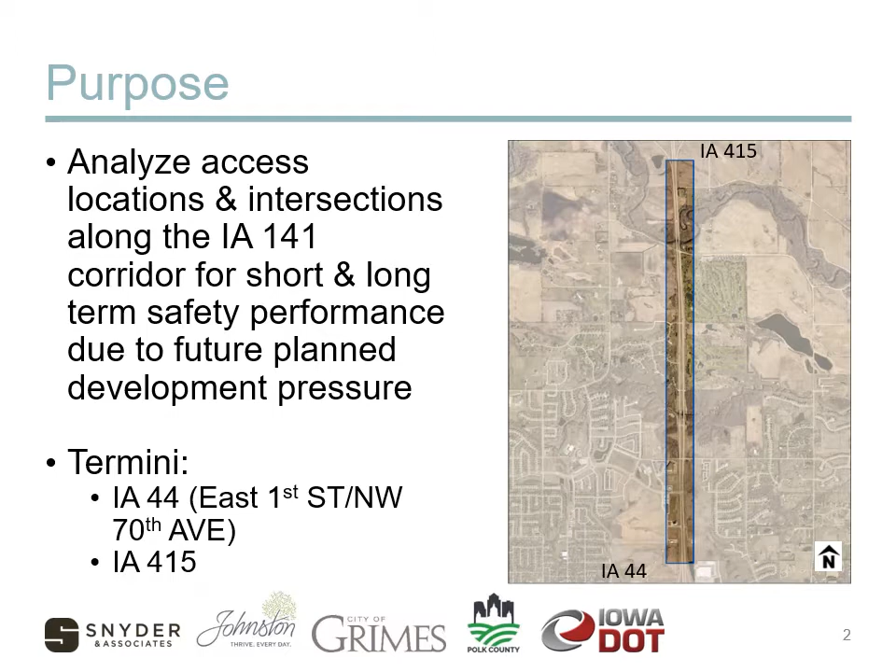To review background information on the conditions within the study corridor, previous planning studies, and local transportation planning that will support the long-term land use along the Iowa 141 corridor, please visit the City of Johnston project page located on the city website. You can also view the video recording of the first public information meeting on May 13, 2021, where the project team presented a summary of the background conditions and potential improvement options to corridor access that were considered while developing draft recommendations for the corridor.

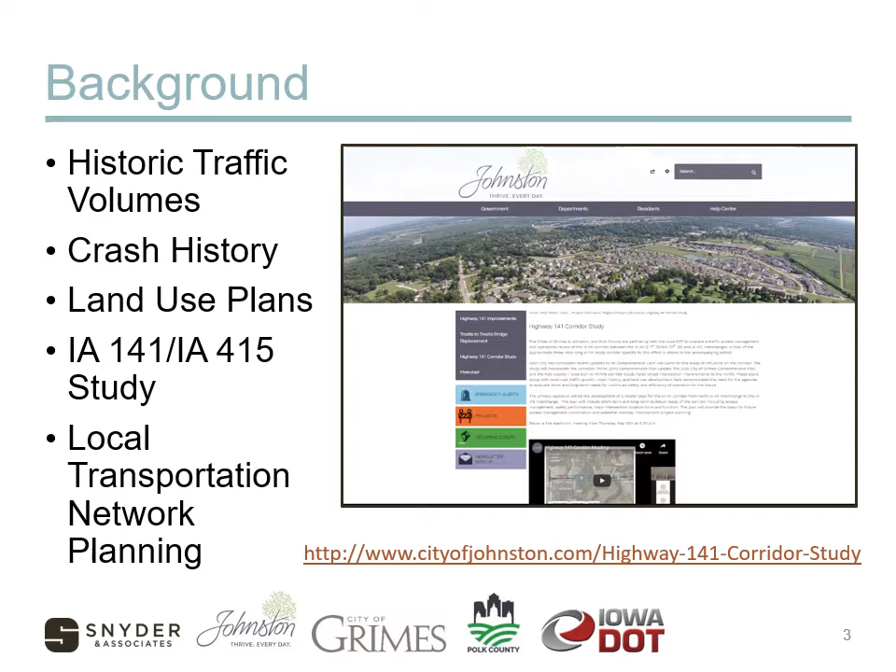The draft corridor plan includes short-term and long-term recommendations related to the roadway corridor, adjacent and future intersecting roadways, and various access points. These draft recommendations are based on safety performance, future land use changes, increases in traffic demand due to adjacent corridor land use traffic flow, overall mobility goals for the highway corridor, and regional needs. The numbered callouts on the map refer to the more detailed exhibits on the following slides for a specific intersection or corridor location.

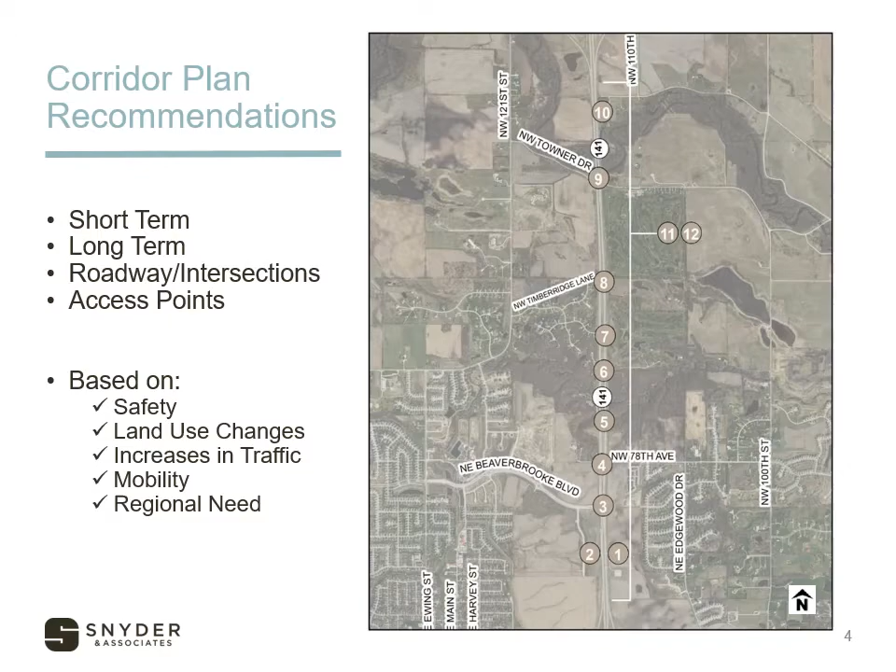We will now present short and long-term draft recommendations for access and intersection locations along the study corridor beginning at the south end. Northeast 10th Street. In the short term, there are no immediate needs. In the long term, as continued development occurs to the west, this right-in, right-out intersection should be monitored for changes in conflict or safety performance. If crash patterns develop between slow-moving, entering, or exiting traffic, evaluate modification options for the movements.

Access to the east. In the long term, this access should be closed after the extension of Destination Drive north to the Northeast Beaverbrooke Blvd traffic signal, at which time access modification should be made to connect the existing land use to Destination Drive.

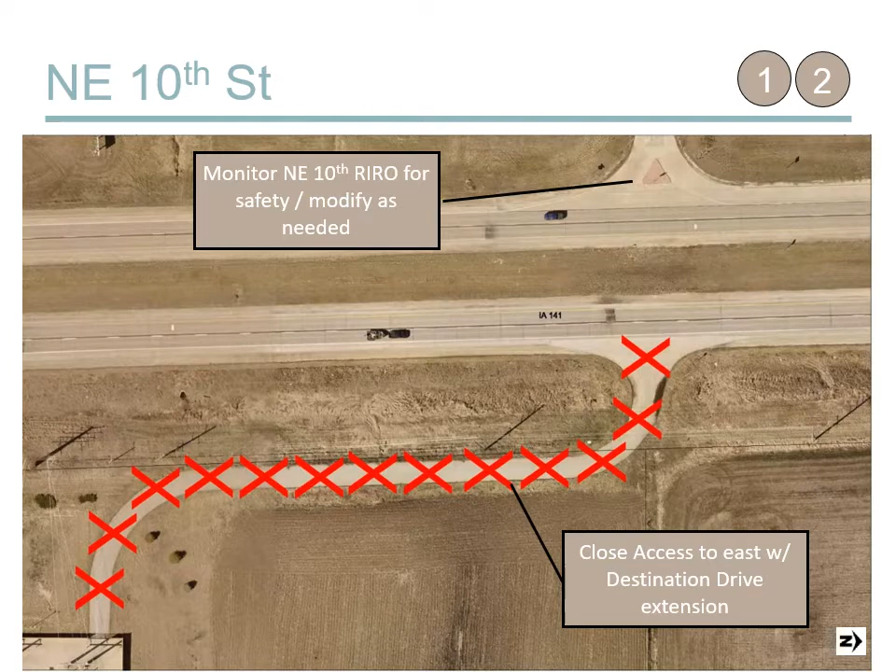Northeast Beaverbrooke Blvd. In the short term, this intersection is not identified for modification. Pending additional severe crashes at Northwest 78th Avenue, Northeast 18th Street, or new development, the east approach of the intersection should be constructed with the parallel street extensions of Destination Drive and Northeast Pointe Drive.

In the long term, full signalized control access continues with development east of Iowa 141 and connections to Destination Drive and Northeast Pointe Drive. The east approach to this intersection should be built in conjunction with the extension of Destination Drive North, Northeast Pointe Drive South connection with Northeast Beaverbrooke Blvd. Development pressure north of Northwest 78th, Northeast 18th could accelerate need for improvements.

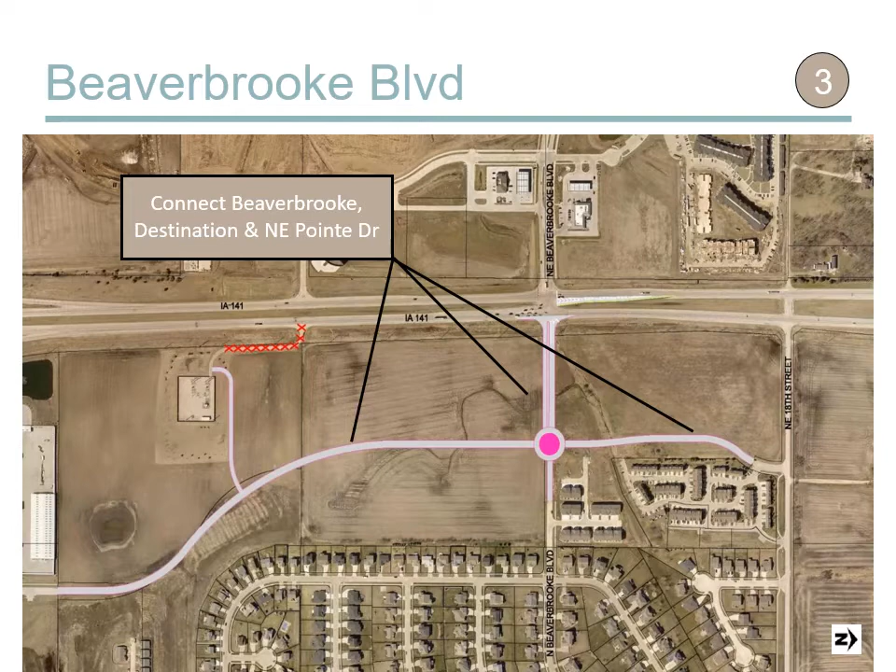Northwest 78th Avenue, Northeast 18th Street. In the short term, partial closure may be required if intersection safety continues to decline. If additional crashes or severity occur in this intersection, modifications to access should be made to limit crossing movements, in particular westbound left from Northwest 78th Avenue or southbound left from Iowa 141 to Northwest 78th Avenue. Additional improvements to increase driver visibility may be necessary, including a positive offset right turn lane for northbound Iowa 141.

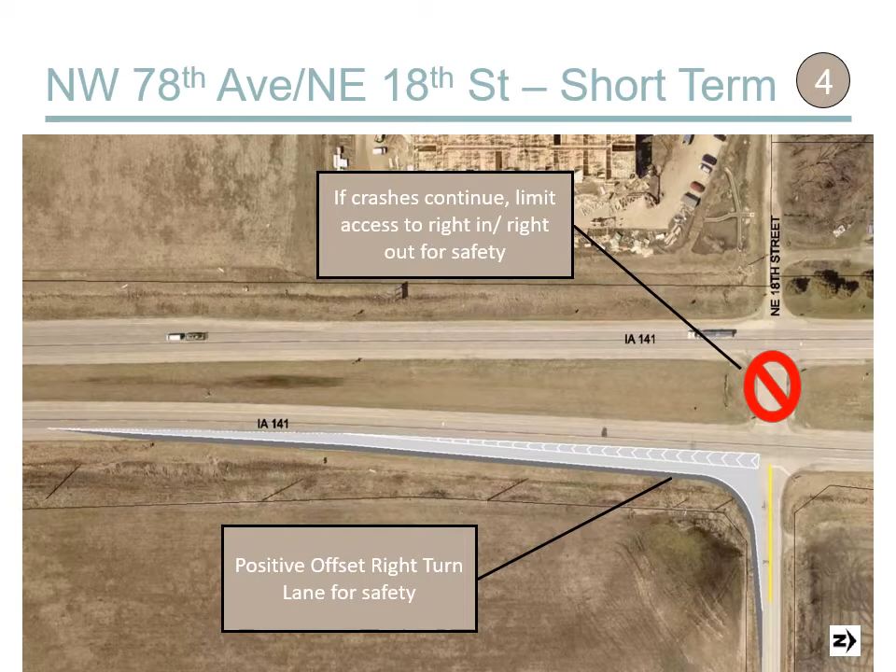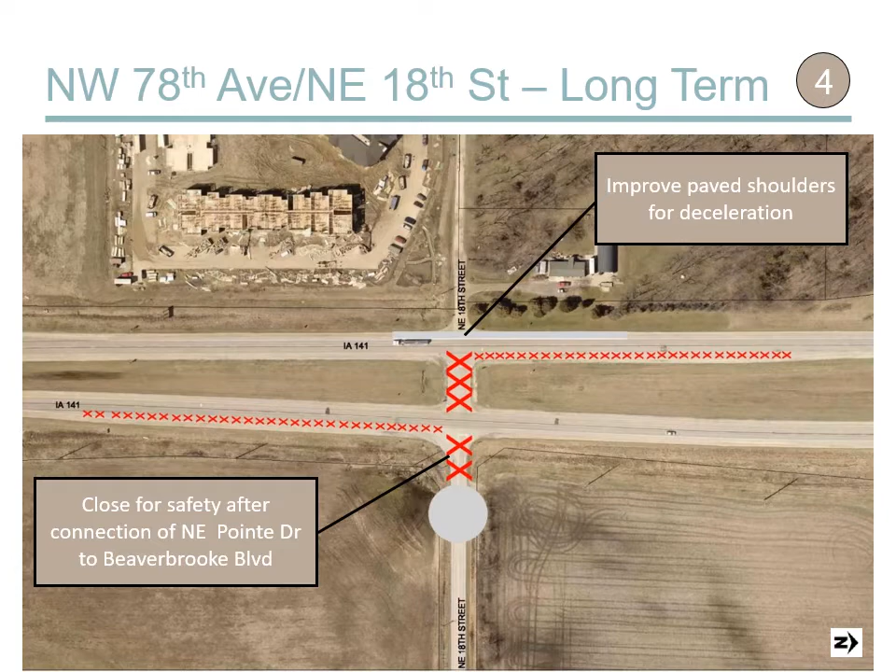In the long term, the east approach should be closed after the extension of Destination Drive and Northeast Pointe Drive north to Northwest 78th Avenue. The west approach can be maintained as a right-in, right-out, or access with northbound left only if complete closure of Northwest 78th Avenue to the east. Further street connectivity to the west should be pursued for properties west of Iowa 141.

Private driveways south of Little Beaver Creek bridges. In the short term, improve paved shoulders at driveway access locations for deceleration area when maintenance improvements occur on Iowa 141. In the long term, if no densification of land use and increase in traffic intensity, this location is not intended for other long-term modifications.

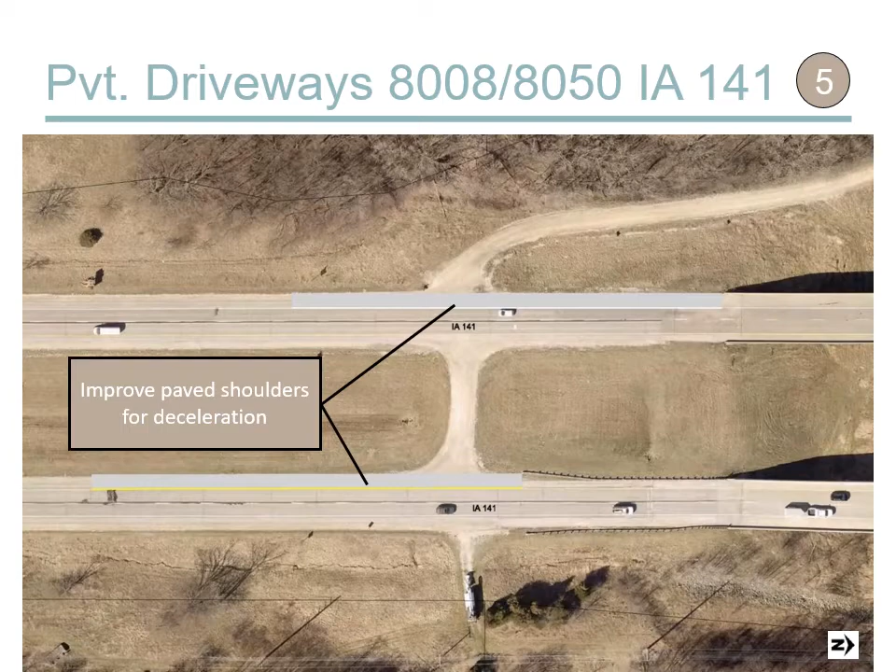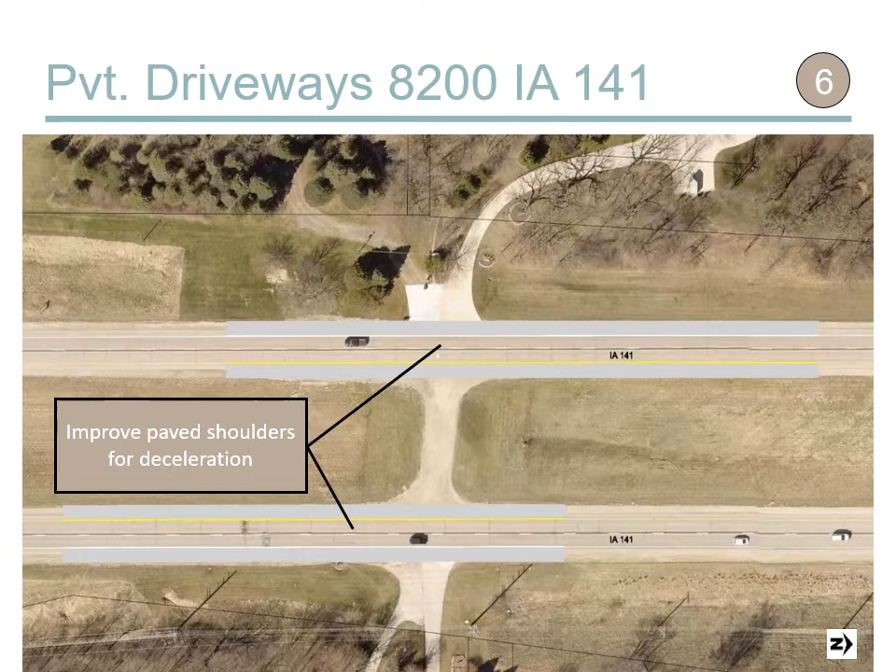Private driveways north of Little Beaver Creek bridges. In the short term, improve shoulders at driveway access locations for deceleration area when maintenance improvements occur on Iowa 141. In the long term, if no densification of land use and increased traffic intensity, this location is not intended for other long-term modifications.

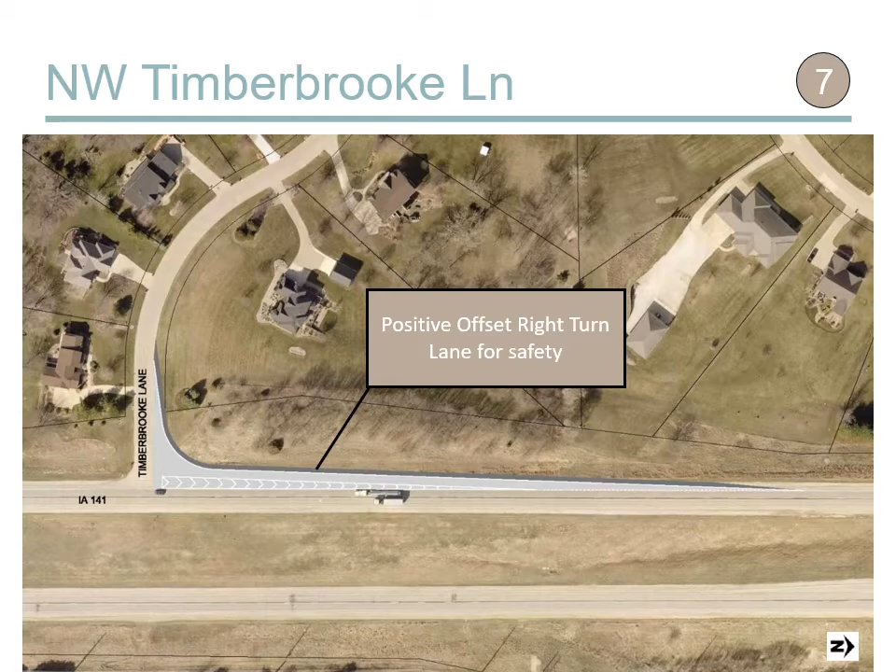Northwest Timberbrooke Lane. In the short term, construct a positive offset right turn lane that will benefit improved sight distance for eastbound to southbound right turn traffic when maintenance improvements occur or safety performance decreases. In the long term, depending on the spacing for the recommended interchange with the relocation of Northwest Towner Drive, Timberbrooke Lane could either continue as a right-in, right-out based on safety performance, or the intersection may need to be closed if the access cannot be maintained.

Northwest Timberridge Lane. In the short term, construct positive offset right turn lane that will benefit improved sight distance for eastbound to northbound left turns or eastbound to southbound right turns when maintenance improvements occur or safety performance decreases. Improve shoulder for northbound right turn traffic for east driveway on Iowa 141 if maintenance occurs or safety concerns.

In the long term, depending on the spacing for the recommended interchange with the relocation of Northwest Towner Drive, Timberridge Lane could either continue as a right-in, right-out if the access can be maintained, or the intersection may need to be closed if the access conflicts with future ramps.

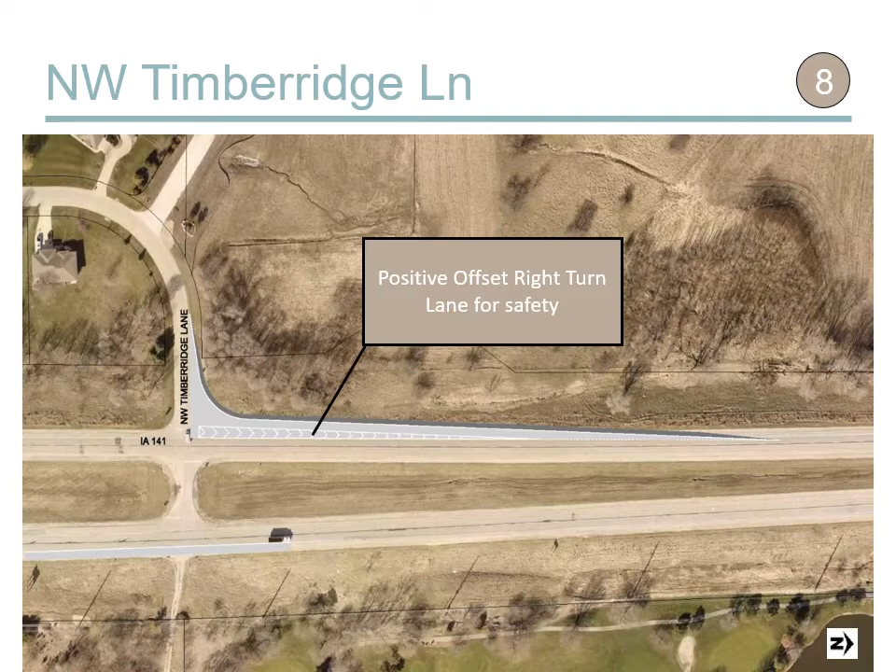Northwest Towner Drive. This intersection has two options for short-term improvement. The first option, west approach of the intersection should be closed per a prior Iowa 141, Iowa 415 study recommendation, and due to continued erosion issues with Beaver Creek and the soil embankment beneath Northwest Towner Drive.

Develop positive offset right turn lane northbound and median improvements to improve westbound Towner Drive to southbound Iowa 141 sight distance. If additional severe crashes occur at this intersection, modifications to access should be made to limit crossing movements.

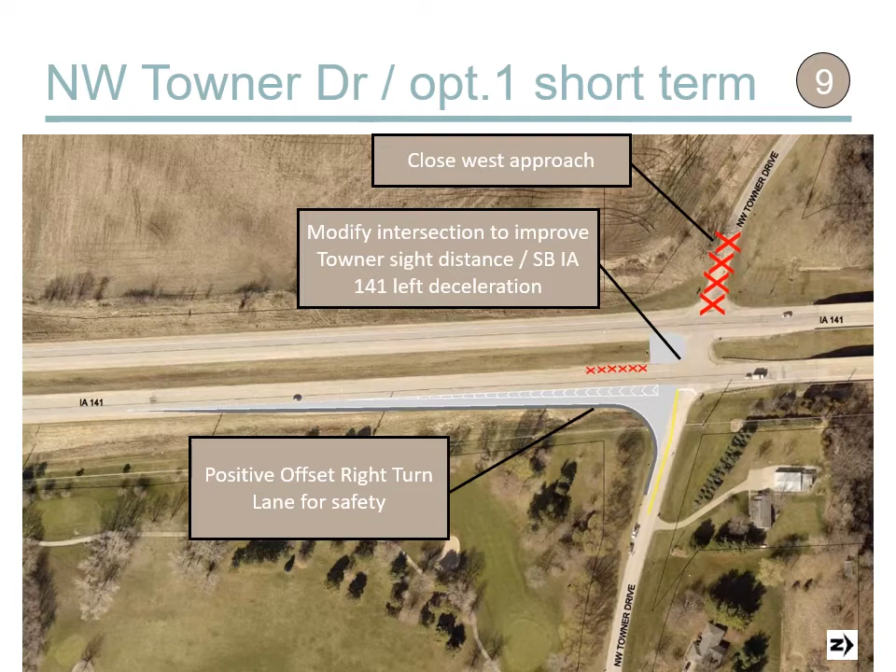Northwest Towner Drive, short term, option 2. The west approach of the intersection should be closed per a prior Iowa 141, Iowa 415 study recommendation, and Beaver Creek soil embankment erosion issue. The east approach is realigned approximately 200 to 250 feet south, and the median is modified to improve spacing from Beaver Creek bridges and improve sight distance and turn lane modifications for all movements.

If additional severe crashes occur at this intersection, modifications to access should be made to limit crossing movements, potential for right-in, right-out, and southbound left-in only.

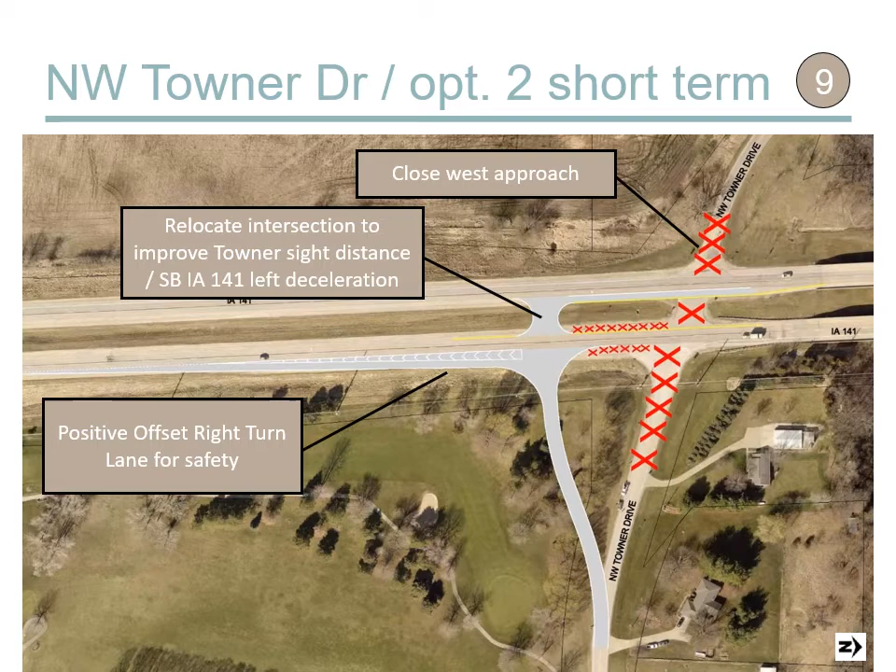Northwest Towner Drive and Northwest 100th Street, 110th Court. In the long term, if redevelopment east of Iowa 141 occurs consistent with comprehensive land use plans, Northwest 100th Street and Northwest 110th Court should be extended to Northwest Towner Drive. Northwest Towner Drive would be closed at its current location and realigned further south, and Northwest Timberbrooke Lane to the east would connect to Northwest 100th Street and Iowa 141.

If level of development and new traffic justifies grade-separated facility at realigned Northwest Towner Drive, consider interchange alternatives and impacts to accesses on Iowa 141. Interchange ramps may necessitate the closure of Northwest Timberridge Lane. Based on long-term land development potential, a relocated Northwest Towner Drive will be needed to facilitate access to the overall areas east and west of Iowa 141 through a grade-separated intersection point.

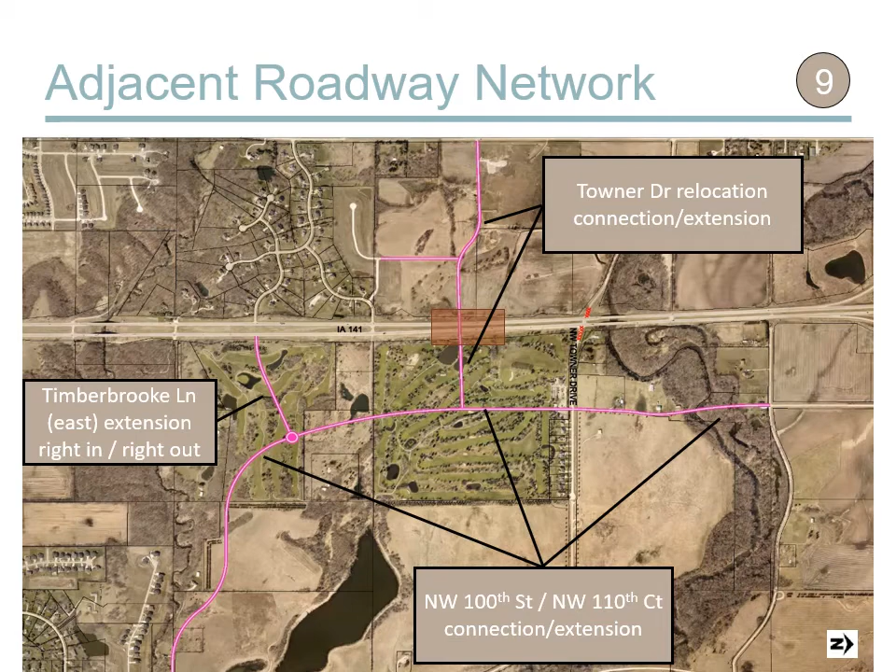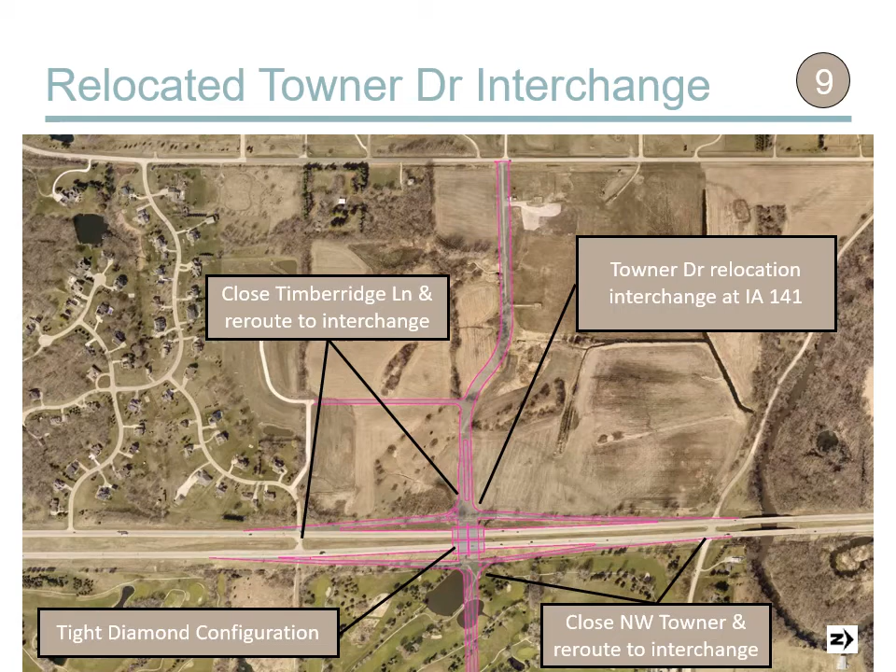In all three interchange concepts, interchange ramps extend beyond Northwest Timberridge Lane to the north and existing Northwest Towner Drive to the south. Those intersections would need to be closed and rerouted through the interchange. The second interchange concept that was developed to demonstrate spacing requirements for a new roadway intersecting Iowa 141 is a roundabout ramp intersection style or dogbone interchange.

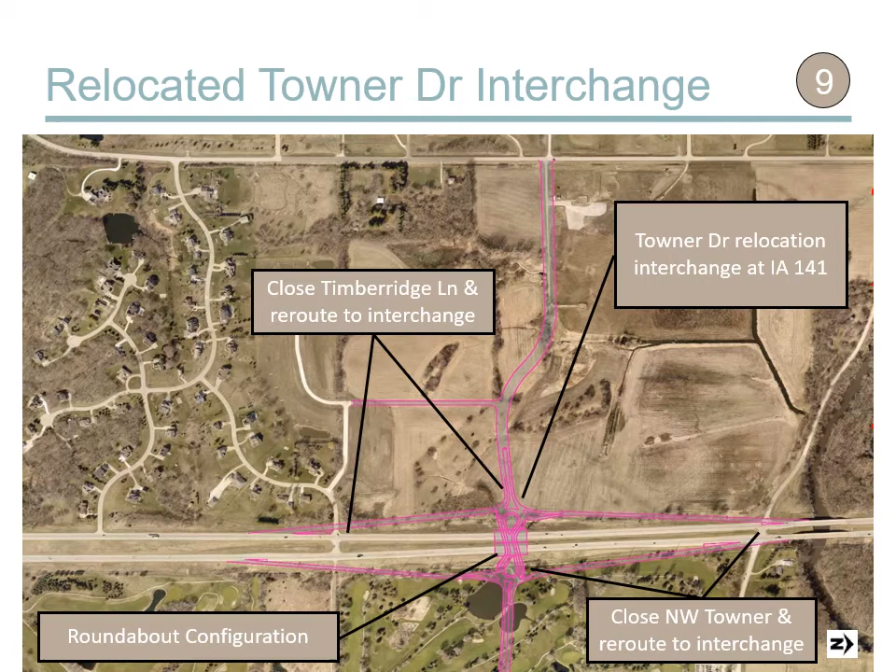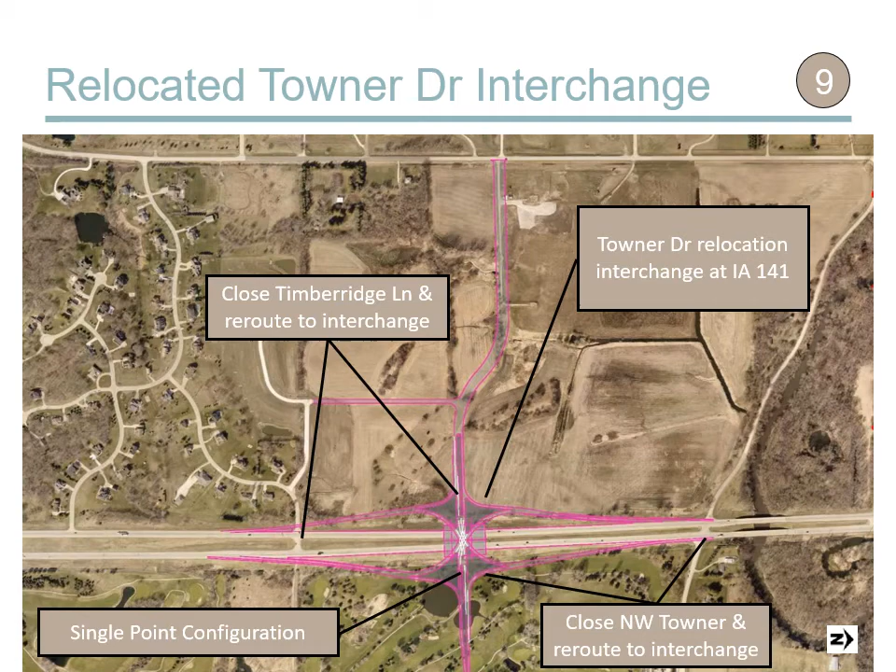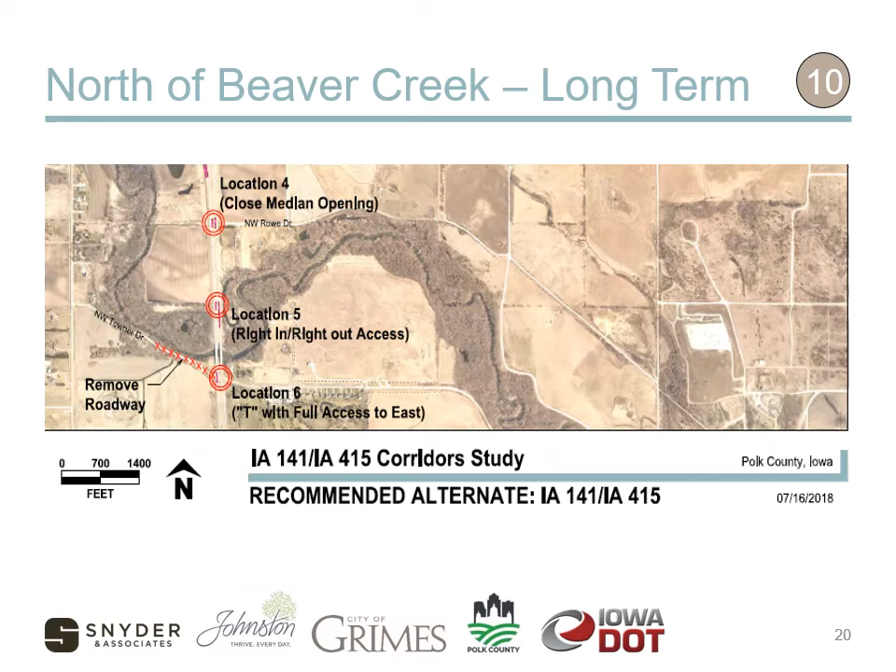The final interchange concept that was developed to demonstrate spacing requirements for a new roadway intersecting Iowa 141 is a single point interchange. This concept is similar to Mills Civic Parkway in West Des Moines at I-35. Access north of Beaver Creek. In the long term, per a prior Iowa 141-415 study, the median opening and field access north of Beaver Creek should be changed to a right in, right out on the west side, with the change in land use causing increased traffic demand.

Other long-term recommendations for the entire corridor length from Highway 44 interchange to Highway 415 interchange include the following. Addition of one travel lane in each direction for 6 total lanes on Iowa 141 as traffic increases. Monitoring of speed limits to consider a potential 55 mile per hour speed limit throughout to transition from the current 65 mile per hour speed limit from Little Beaver Creek North through Highway 415. This will maintain mobility, yet balance safety needs and crash severity. And finally, monitoring the safety performance at any intersection or conflict point for potential corrective measures.

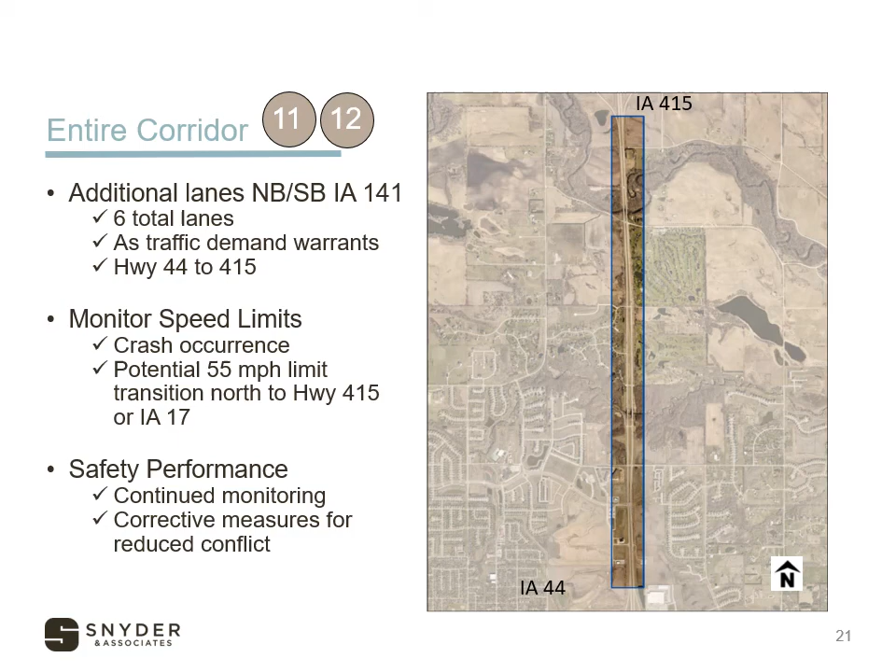The draft corridor plan recommendations are complete, and further details can be found in the draft corridor study. An open house style public meeting with agency and consultant staff will be held at Johnston City Hall Wednesday, August 18th from 5:30 p.m. to 7 p.m. Following this public meeting, comments and feedback from the public will be gathered and incorporated into a final corridor study for the cities, county, and Iowa DOT to use in the continued planning and management for improvements and land use development in the corridor.

To view additional information regarding the study or for an email link to submit questions or comments to project staff, please refer to the City of Johnston's website and the specific Highway 141 Corridor Study Project page. On behalf of all 4 agencies, thank you for participating in this important study.